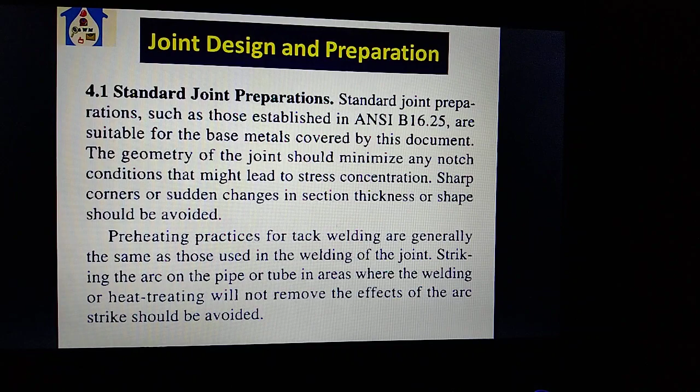Preheating practice for tack welding is generally the same as used in welding of the joint. Striking the arc on the pipe or tube in areas where welding or heat treating will not remove the effect of the arc strike should be avoided.

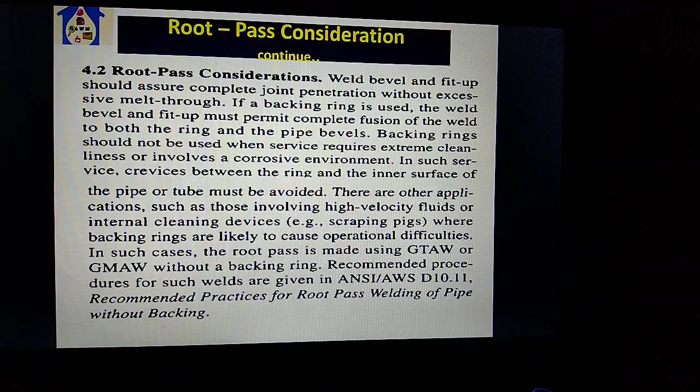Root pass considerations: weld, bevel, and fit up should ensure complete joint penetration without excessive melt through. If a backing ring is used, the weld bevel and fit up must permit complete fusion of the weld with both the ring and the pipe bevel.

Backing rings should not be used when service requires extreme cleanliness or involves a corrosive environment. In such service, crevices between the ring and the inner surface of the pipe or tube must be avoided. There are other applications, such as those involving high velocity fluids or internal cleaning devices like scraping pigs, where backing rings are likely to cause operational difficulties.

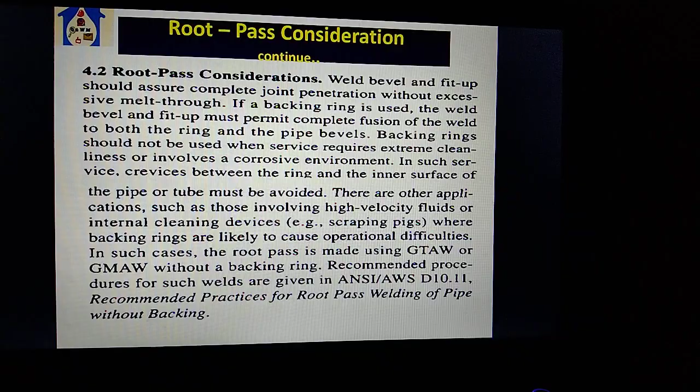In such cases, the root pass is made using GTAW or GMAW without a backing ring. Recommended procedures for such welds are given in ANSI AWS D10.11, Recommended Practice for Root Pass Welding of Pipe Without Backing.

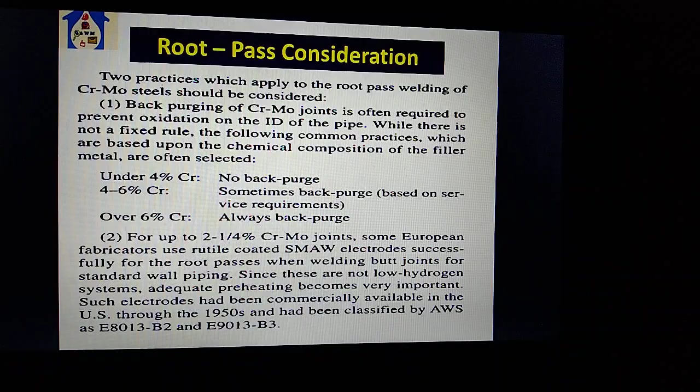Two practices which apply to the root pass welding of chromium-molybdenum steel should be considered. First, back purging of chromium moly joints is often required to prevent oxidation of the ID of the pipe. While there are no fixed rules, the following common practices, based upon the chemical composition of the filler metal, are often selected.

Under 4% chromium, no back purge. 4 to 6% chromium, sometimes back purge based on service requirement. Over 6% chromium, always back purge.

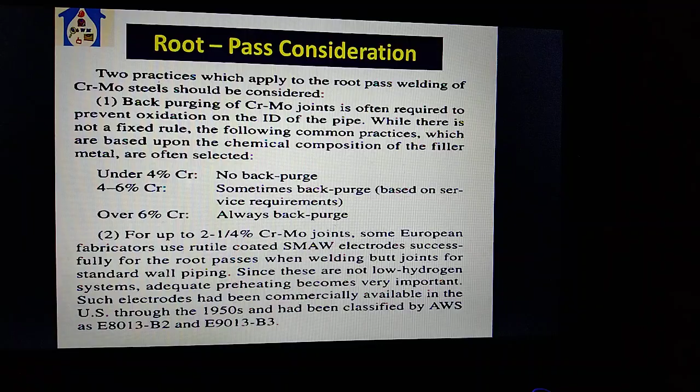Second, for up to 2.25 chrome moly joints, some European fabricators use rutile coated SMAW electrodes successfully for the root pass in welding butt joints for standard wall piping, since these are not low hydrogen systems. Adequate preheating becomes very important.

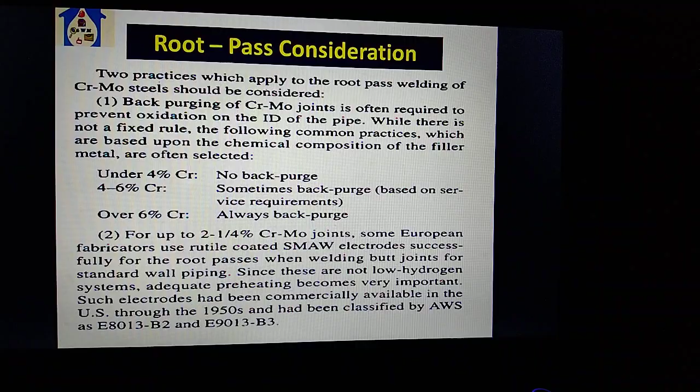Such electrodes had been commercially available in the US through the 1950s and had been classified by AWS as E8013-B2 and E9013-B3.

Fit up. In addition to tack welds, joint alignment can be maintained by internal or external supports, jigs, or fixtures. They should be adequate for welding the joint and minimize tensile, bending, or transverse stress during welding. However, they should be flexible enough, or should be removed during the course of welding, in order to permit normal weld shrinkage and thereby reduce stress that might cause cracking.

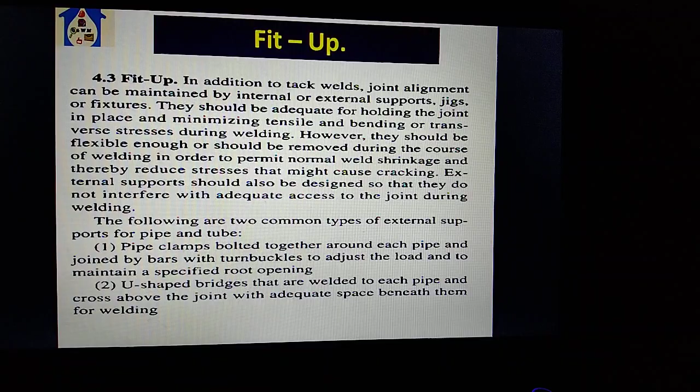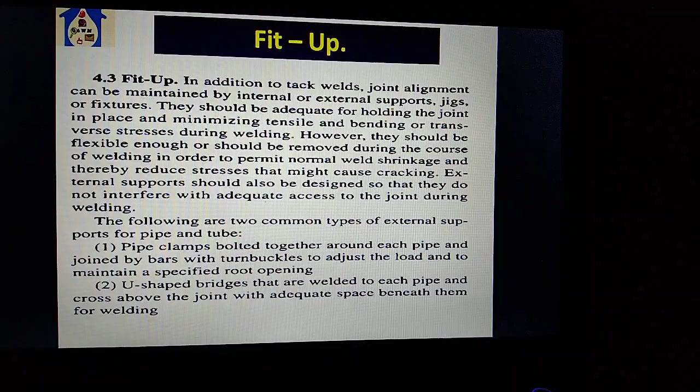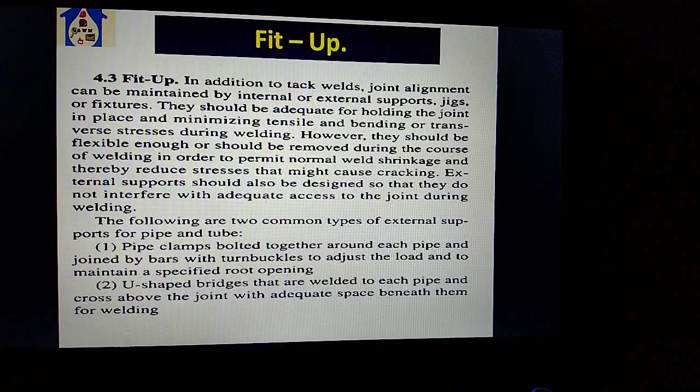External supports should also be designed so that they do not interfere with adequate access to the joint during welding. The following are two common types of external supports for pipe and tube. First, pipe clamps bolted together around each pipe and joined by bars with turnbuckles to adjust the load and maintain a specific root opening. Second, U-shaped bridges that are welded to each pipe and cross above the joint with adequate space beneath them for welding.

Preheating. General preheating is recommended for all chromium and molybdenum steel and should be maintained throughout the entire welding operation. That includes prior to any thermal cutting, prior to striking an arc for tack welding, and after weld interruption. In some cases, the preheat is maintained during interruption until some type of post-heating is started, or both.

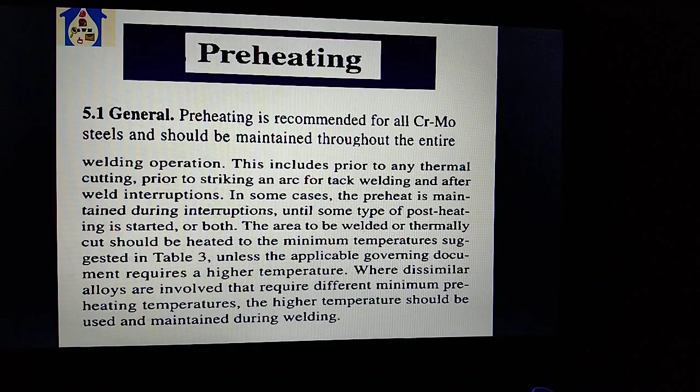The area to be welded or thermally cut should be heated to the minimum temperature suggested in Table 3, unless the applicable governing document requires a higher temperature. Where dissimilar alloys are involved that require different minimum preheating temperatures, the higher temperature should be used and maintained during welding.

For some materials, maximum preheating or interpass temperature limits, or both, have also been established. Such limits apply primarily to materials heat treated to achieve specific properties, such as low temperature notch toughness, and/or materials not suitable for high temperature service.

Since the chromium molybdenum steels discussed in this document are usually selected for elevated temperature service conditions, maximum preheat and interpass temperatures are usually not required by metallurgical consideration, but may be imposed because of welder comfort.

However, for dissimilar metal joints involving austenitic stainless steel and nickel alloys, a maximum interpass temperature should be specified.

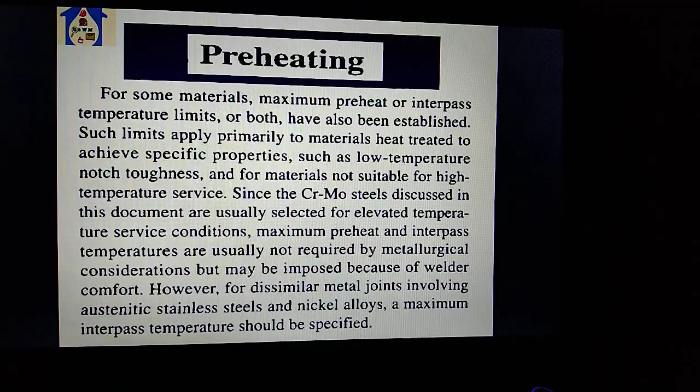Temperatures lower than those given in Table 3 are recommended for welding of the root pass with GTAW on low chromium alloys. Lower temperature permits better control of the shape of the root bead with less likelihood of excessive reinforcement or melting through. The slower travel speed and the lower hydrogen and moisture level associated with the GTAW process justify some reduction in preheating temperature.

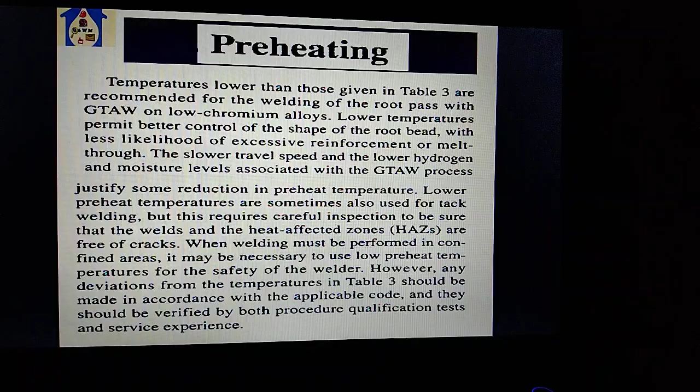Lower preheat temperatures are sometimes also used for tack welding, but these require careful inspection to ensure that the weld and the heat affected zone are free of cracks. When welding must be performed in a confined area, it may be necessary to use low preheat temperature for the safety of the welder. However, any deviation from temperatures in Table 3 should be made in accordance with the applicable code, and they should be verified by both procedure qualification test and service experience.

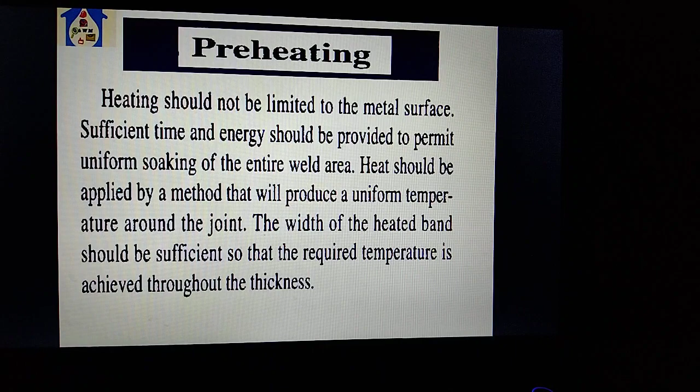Heating should not be limited to the metal surface. Sufficient time and energy should be provided to permit uniform soaking of the entire weld area. Heat should be applied by a method that will produce uniform temperature around the joint. The width of the heated band should be sufficient so that the required temperature is achieved throughout the thickness.

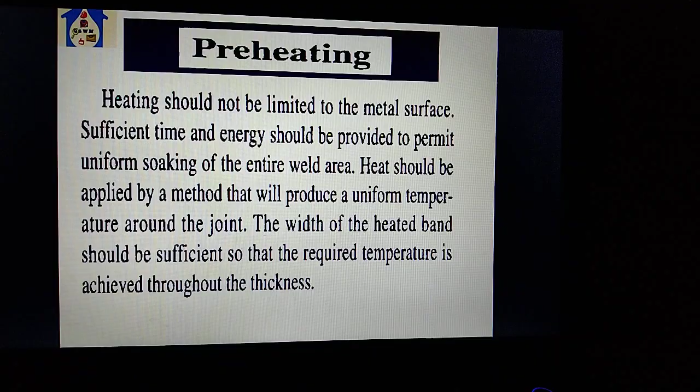Oxyfuel gas torch heating may produce excessive temperature gradient not only through the thick wall but also around the circumference. Unless heating is done uniformly around the joint, special care is required when the same surface is used for heating and for measuring the temperature.

To be sure that through heating, and not just surface heating, has been achieved, it is advisable to wait about 1 minute between removal of the heating torches and measurement of the temperature. This is not a problem when heating from one side and measuring the temperature from the other. Thus, when access and safety considerations permit, effective preheating can be achieved by placing the heating torch inside the pipe while welding from the outside.

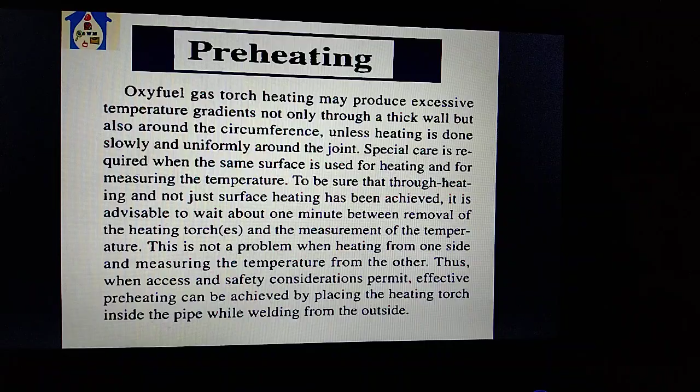Another preheating method involves the use of wraparound electric resistance heaters. These heaters are typically used in conjunction with a thermocouple attached to the pipe to monitor and control temperature. Such preheating provides uniform, continuous heat before welding, while welding is in progress, and during interruptions. Use of a thermocouple to monitor and control temperature also permits a permanent record of the preheat temperature to be produced for quality assurance purposes.

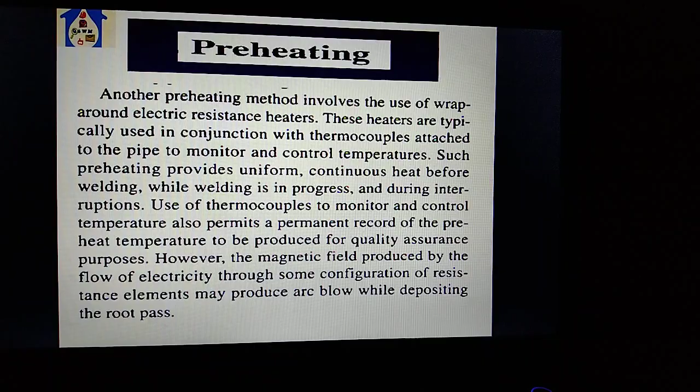However, the magnetic field produced by the flow of electricity through some configurations of resistance elements may produce arc blow while depositing the root pass.

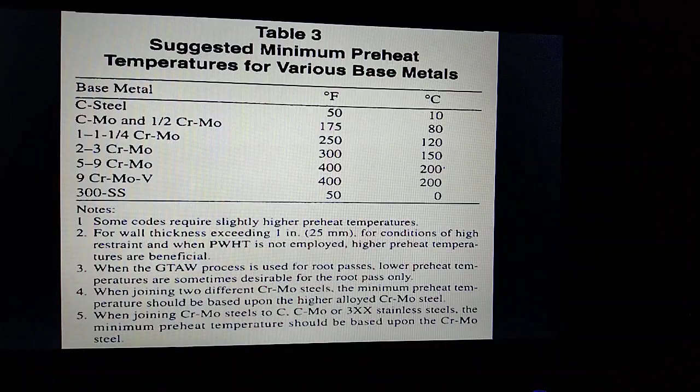Table 3 suggests a minimum preheat temperature for various base metals denoted here, and temperature of the heating cycle.

Preheating is normally maintained until the welding has been completed. However, interruption of the preheat may be acceptable after evaluating the situation. The effects of interrupting the heating cycle are primarily mechanical in nature. A combination of residual stress, low ductility, and the presence of hydrogen may promote cracking at ambient temperature.

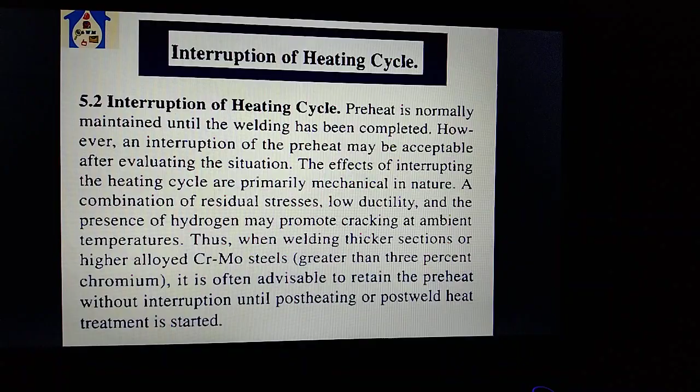Thus, when welding thicker sections or higher alloy chromium-molybdenum steel greater than 3% chromium, it is often advisable to retain the preheat without interruption until post-heating or post-weld heat treatment is started.

Interruption of the heating cycle: when interrupting or after completing the welding of the chromium moly steel joint and prior to dropping the preheat, it is advisable to increase the temperature by about 100 degrees Fahrenheit, 50 degrees centigrade, for at least 15 minutes, and sometimes up to 4 hours, to permit hydrogen to diffuse out and decrease the risk of hydrogen induced cracking.

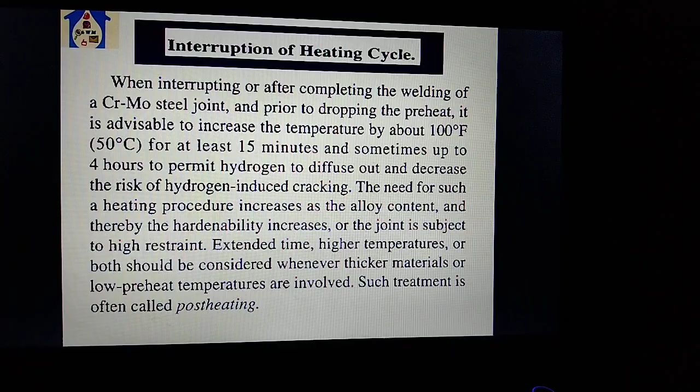The need for such a heating procedure increases as the alloy content, and thereby the hardenability, increases, or the joint is subject to high restraint. Extended time, higher temperature, or both should be considered whenever thicker material or low preheat temperature are involved. Such treatment is often called post-heating.

Moisture and other materials containing hydrogen can be introduced into the arc from both water vapor and hydrogen containing compounds. If hydrogen is absorbed in the metal, it may interact with residual stress and cause cracking when the weldment is cooled.

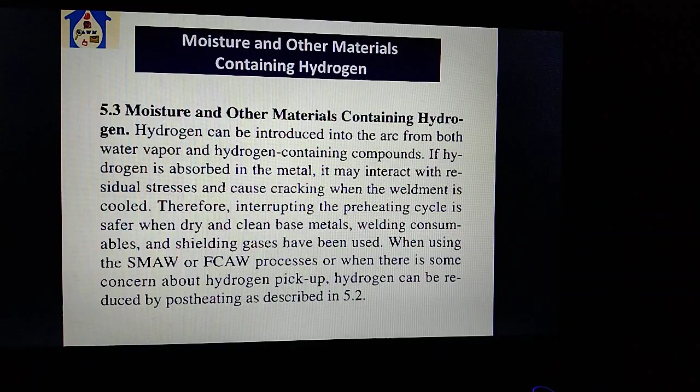Therefore, interrupting the preheating cycle is safer when dry and clean base metal, welding consumables, and shielding gas have been used. When using the SMAW or FCAW process, or when there is some concern about hydrogen pickup, hydrogen can be reduced by post-heating as described in section 5.2.

Joint restraint: interruption of the heating cycle is more risky if a partially complete weld is subject to bending moment or high axial loading. First, such bending moment may be encountered while transporting inadequately supported, partially welded piping assembly, such as moving them to a heat treating or inspection area. Second, high axial loading is encountered

during a preparation operation called springing. This is used for closure welds of pipe maintained for elevated temperature service. The pipe is deliberately installed too short in order to compensate for thermal expansion. The tensioning device used to position the joint for welding should not be removed until the welding and all post-heating has been completed.

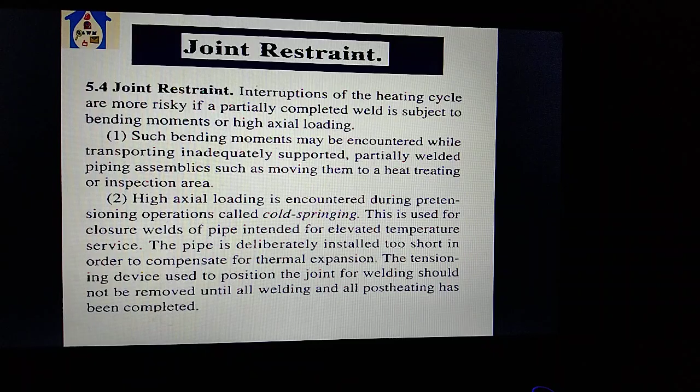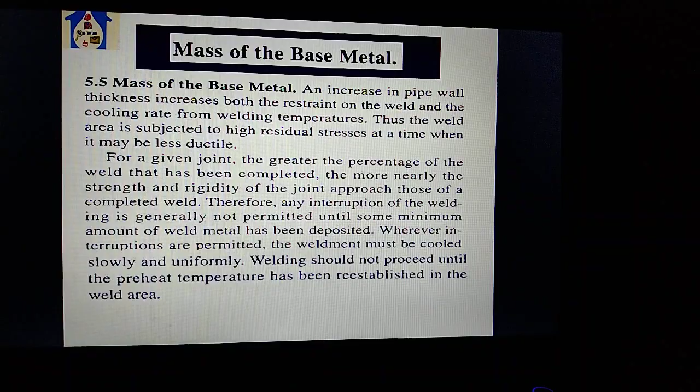Therefore, any interruption of the welding is generally not permitted until some minimum amount of weld metal has been deposited. Wherever interruptions are permitted, the weldment must be cooled slowly and uniformly. Welding should not proceed until the preheat temperature has been re-established in the weld area.

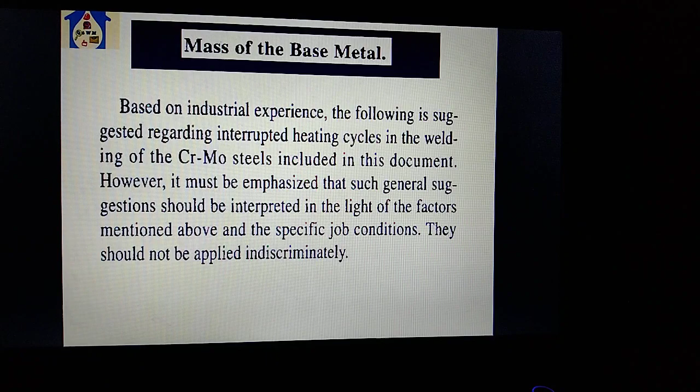Based on industrial experience, the following is suggested regarding interrupted heating cycles in the welding of the chromium-moly steel included in this document. However, it is emphasized that such general suggestions should be interpreted in light of the factors mentioned above and the specific job conditions. They should not be applied indiscriminately.

For chromium-moly steel containing less than 4% chromium, the heating cycle may be interrupted provided the greater of two layers has been deposited, or 1/3 of the groove has been filled with weld metal. In addition, the welding procedure should employ adequate preheating, dry low hydrogen filler metal, post-heating, and slow cooling to ambient temperature.